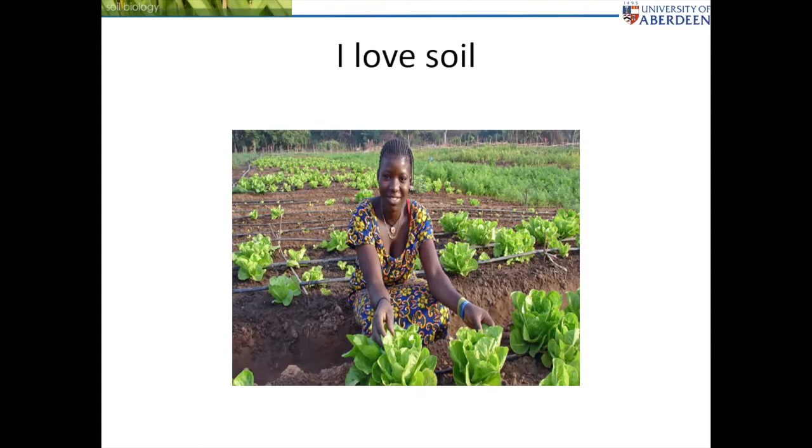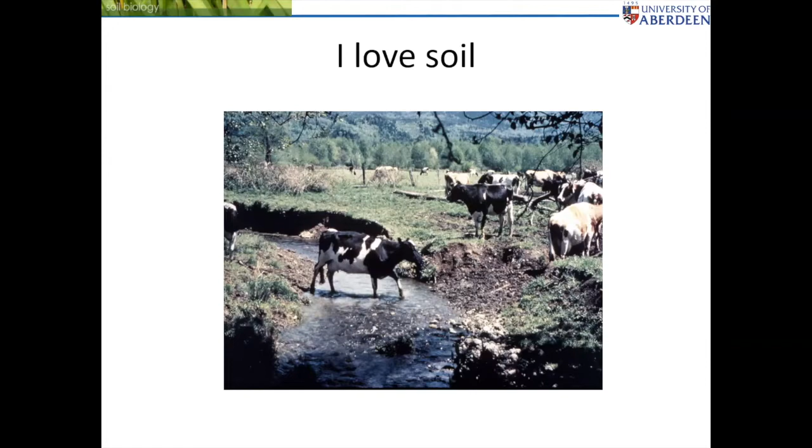In fact, really putting my research and my teaching in perspective, I love soil. I love soil because fundamentally, soil feeds the world. We can think about vegetation, but also I love soil because it hosts livestock as well. We forget that in this part of the world, livestock is such an important component of livelihood. I love soil also because fundamentally it hosts the plants that fix the carbon that COP26 is all about.

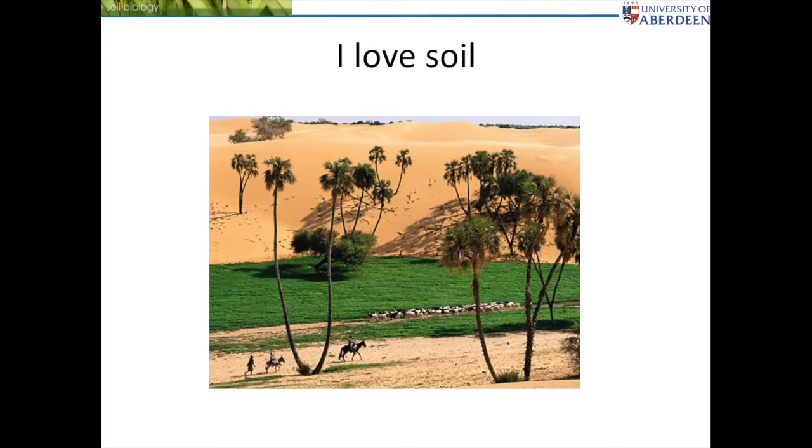love soil because it is the boundary between aridity and sustainable agriculture. I've done a lot of work in the Middle East, and again, we can see that soil with very, very little adjustment can suddenly feed people, stabilize land, and be quite different from other component parts of the environment.

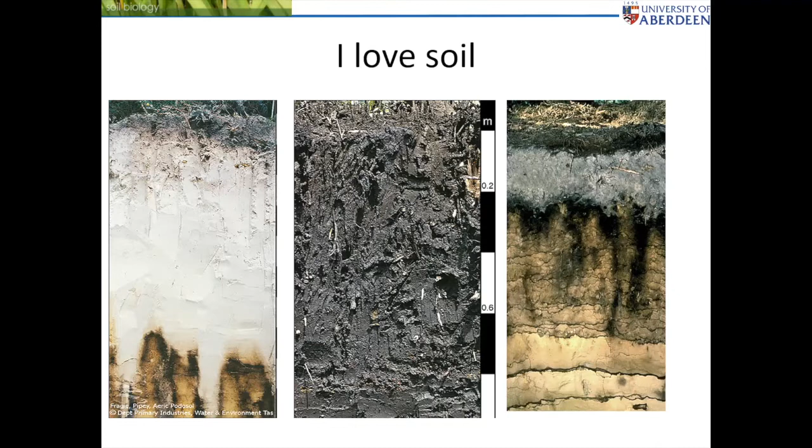But perhaps most importantly, I love soil because it's a very beautiful feature, and it's something we don't often see. We can look at this image and see the colors. We can see the presence of organic carbon. We can see leaching. We can see iron. We can see highly oxidized environments. Soil, regardless of where you are in the world, is a really beautiful feature, and it's part of our environment.

But tonight, I'm not going to focus on beautiful soils. I'm going to focus on the opposite. I'm going to talk about soils that we've wrecked through the release of pollution into the environment.

And I can think about pollution in several ways. I can think about elemental pollution. Let's look at the periodic table, pollution caused by agriculture and industry. I'm going to touch on hydrocarbons as well, industrial and spills. And also you can think about pesticides, when we purposely apply a poison into the environment because it might degrade or it might stay there in the future.

And then finally, and I'm not going to talk about this at all tonight, but it's something maybe to discuss in the future, is the impact of nanoparticles in the environment, because ultimately these will be sequestered into the soil environment.

Well, let's start with potentially toxic elements. I use that term because I'm not just talking about metals, I'm also talking about semi-metals, antimony, and arsenic in particular. What we can see here is that there's a group of elements coded red that we tend to call heavy metals: chromium, nickel, zinc, and also we can see arsenic and antimony underneath the nitrogen and phosphorus. Now, some elements respond to my first graph on the right of the screen.

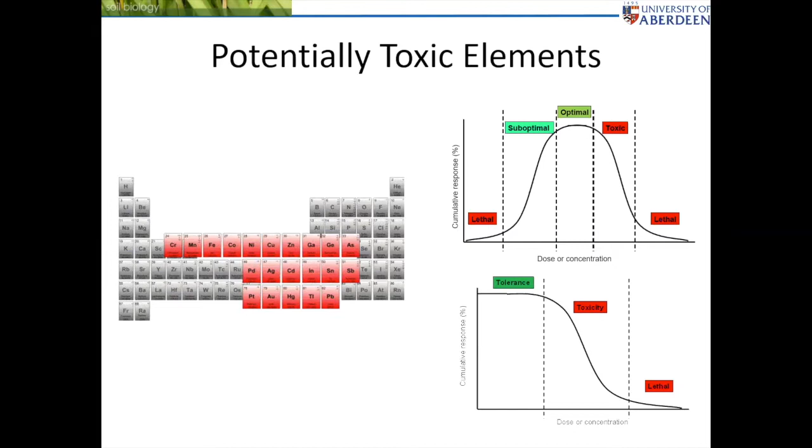But the second graph shows a different set of elements that includes mercury, lead, cadmium, antimony, and arsenic. These are elements that we don't think have a credible biological beneficial purpose. And therefore, at lower concentrations, organisms can tolerate them, but then again become toxic, and at some point become lethal. So one of the problems we have within soil is not just measuring the concentration of a given element, but placing it in the context of the harm that it might cause.

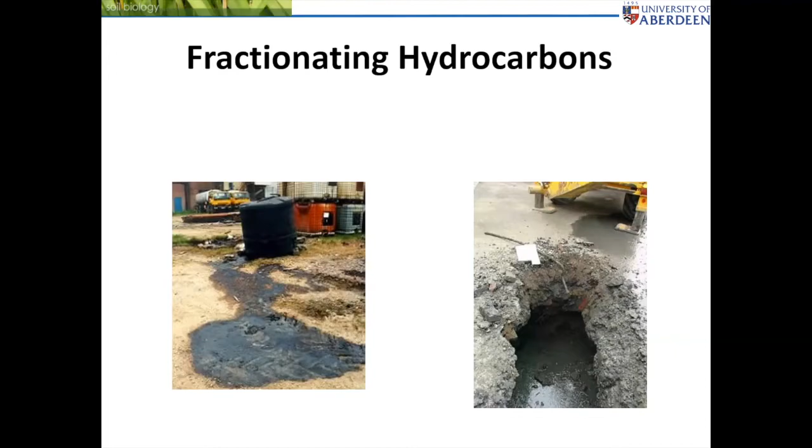The hydrocarbons are slightly different, and this is just an example of two areas where I've captured leaking hydrocarbons. In addition to my university position, for a long time I had an environmental consultancy and diagnostic company that specifically focused on cleaning up contaminated soils. I'll use many of these examples this evening.

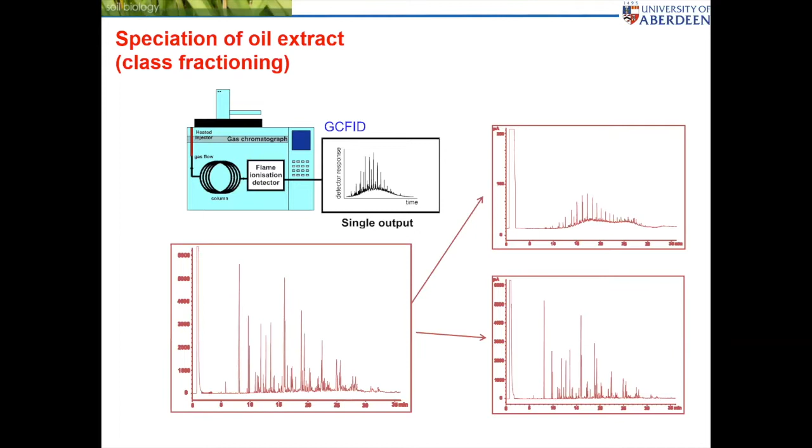When we look at hydrocarbons, we have to chemically quantify the amount of the hydrocarbon, and that's why I want to use the term fractionation. So I take a sample, I use a solvent to remove the hydrocarbon, and then I run it through a gas chromatograph. The gas chromatograph allows me to see the different lines of molecules separated by temperature. So as I look at the right-hand side of this graph, I'm seeing molecules that are generally of a heavier molecular weight than I'm looking at on the left of the graph. So it allows a separation, and I can then look at those individual peaks and relate them to molecules.

Now, what we then think about is how can we relate a measured concentration in the field to the potential harm that could cause to different receptors. By receptors, I mean humans, I mean ecology, and I also mean water.

And believe it or not, the key receptor that we use to protect soil is a toddler. Now, what we don't do is give thousands of toddlers soil and then see when there's an impact. What we do instead is develop lab-based systems that understand the amount of a given contaminant that can be desorbed from the soil and assimilated into the toddler. We choose toddlers because they're small, with a small body mass, and they're also prone to licking their fingers and actually taking in more soil than adults.

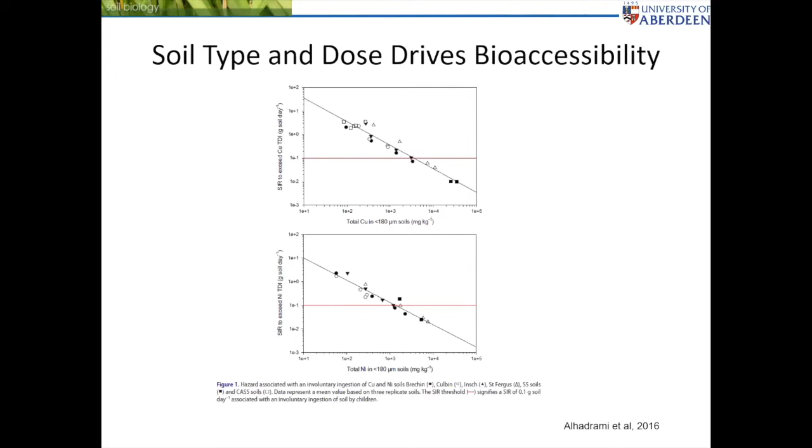Now, we can actually correlate quite clearly that there's a relationship between the amount of soil and, believe it or not, the size fraction of soil and the harm it does to a human receptor. And that's widely published.

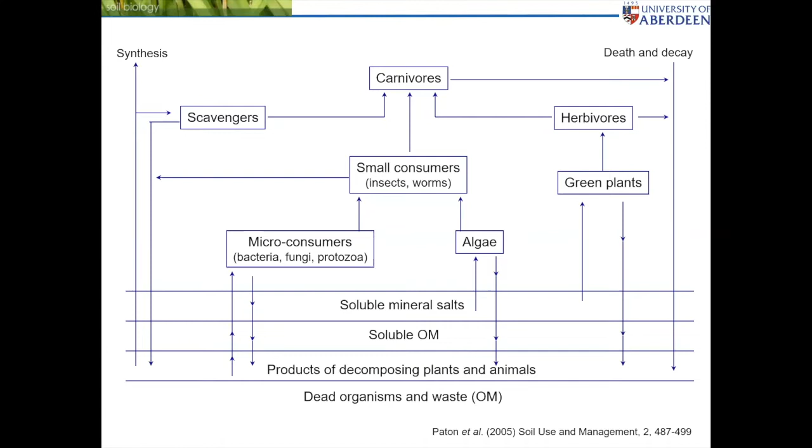When I think about ecological aspects of soil, I stand back and I see an incredibly complicated relationship. This shows at the base of this figure, I've got organic matter, dead waste. What happens is microorganisms will process that and they'll liberate things like nitrogen, which can be transformed from organic to inorganic, and then that's taken up by plants. So there's lots of different functional activities taking place in plants, and we can begin to see how we are impacted by the presence of contaminants.

In fact, what I specialize in is looking at biological tests to understand the harm caused by pollution. So I use a lot of different microbial tests, such as measuring activity, the size of it, looking at key processes like nitrification, or looking at enzymes in the soil.

I then also use earthworms, because earthworms are easy to count, easy to grow. They live in the soil and they eat the soil and they exude material. You can look at how much harm contaminants do by looking at the impact on earthworms.

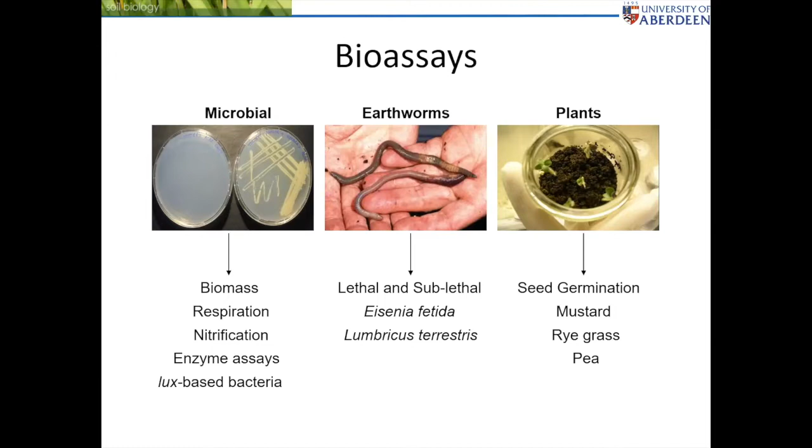And of course, I look at plants, because plants ultimately use the soil, they make available different components, and we can look at germination or mature plants in terms of that process. So when I look at ecology, I'm trying to understand the functional relationship of these different components.

Now, when I think about humans, I'm able to sit down, in the case of organic molecules, and relate observed human effects to different concentrations. So if I look at this table here, I'll just pick on some key details. The first thing is I can look at the different fractions, so aliphatic, meaning straight chains, and aromatic, being ring-based structures. I've not named individual molecules here.

What I've done instead is I've focused on different fractions. So the first fraction, aromatic C5 to C7, carbon 5, carbon 7, that includes benzene. And we know benzene is a carcinogen, and it's not particularly good to play about with benzene, to inhale it or to touch it. So we can see here that the residential without plant risk value is 0.6. That means if the value is less than 0.6 mg per kilogram, no long-term harm is likely to be caused by children playing in that material.

Now, if I scan down and look at, for example, C35 to 44 aliphatic, so that's the chains with carbon of 35 to 44, so big molecules. Basically, the risk here is at 27,600 mg per kilogram. That becomes a problem for the toddler. So we can see that we've got one at 0.6 and one at 27,600 mg per kilogram.

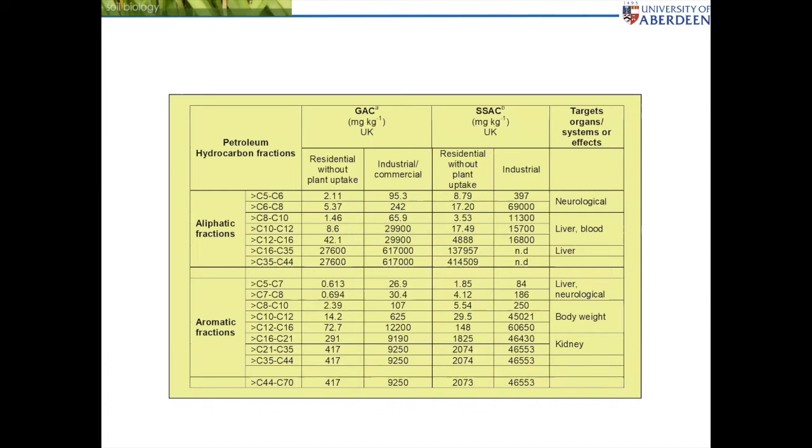So great differences. A lot of my time is spent developing these tables, using data that is validated to try and develop these, and then using this to develop models. And there's a range of models that we use within my group.

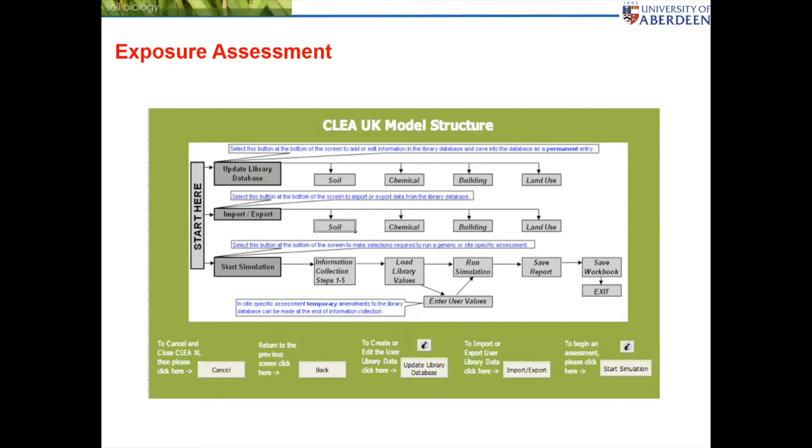This here is a UK-wide model called Contaminated Land Exposure Assessment. This is the sentinel model that the agencies use, and it allows a Monte Carlo simulation to derive site-specific criteria based upon really the values I've shown. And that's freely available and useful to look at.

So I can define a cleanup value, I can define a concentration that no longer poses particular harm, but commercially I need to create the link of how I can develop a technique to validate I've met that concentration.

And that's what I call predicting cleanup.

Over the years, I've done a lot of work on hydrocarbons, both in the lab and the field. What I developed with my team was a set of simple experiments that characterized the likelihood of degradation taking place in the soil. It was very simple: measuring the indigenous activity, the amount of genes induced to degrade hydrocarbons, the total concentration of the hydrocarbon and its form, and the number of degraders. Quite a simple process.

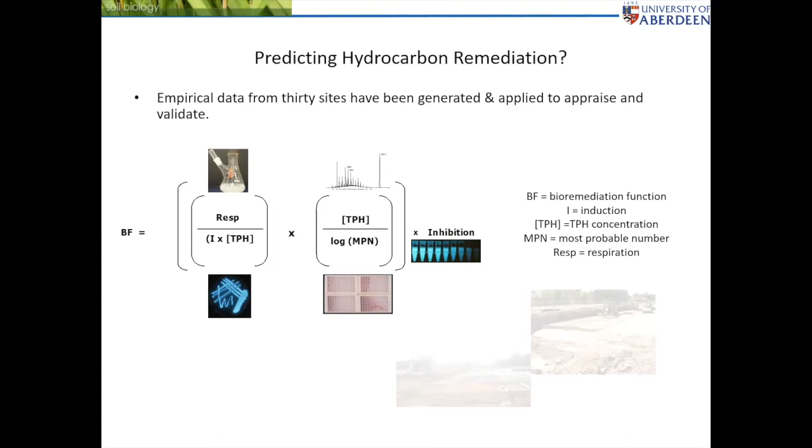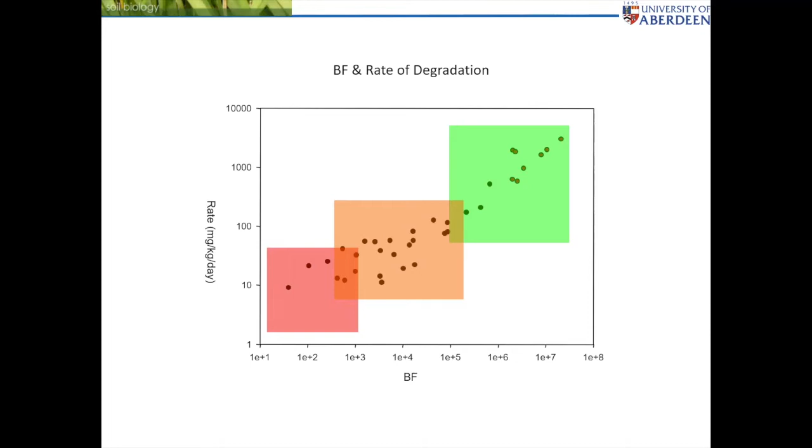What that enabled me to do is establish a traffic light system. If the factor of degradation was in the green, it meant it was happening—an absolute no-brainer, degradation would take place. If it was in the red, it wasn't going to happen very quickly for hydrocarbons, and it probably required a lot of help, nutrients or augmentation or something else. In the amber area was material likely to work but requiring a bit more of a prod. Commercially, I began to look at sites in amber and try to make them turn green. That was really quite an interesting way of promoting science.

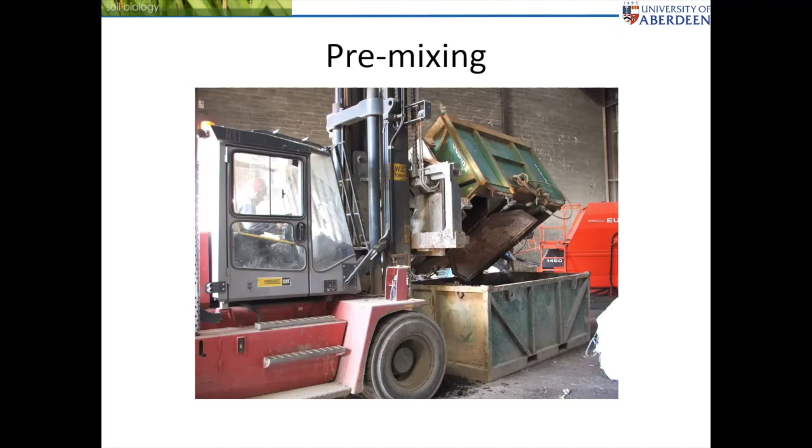At that time, I was really interested in thinking: well, here's a kilogram in the lab, what happens if we tried 10 tons in the field? So we went down to the Royal Dockyard at Rosyth, collected lorry loads of soil, brought it back up to Peterhead, mixed it, homogenized it, and then grew up hundreds of litres of degraders.

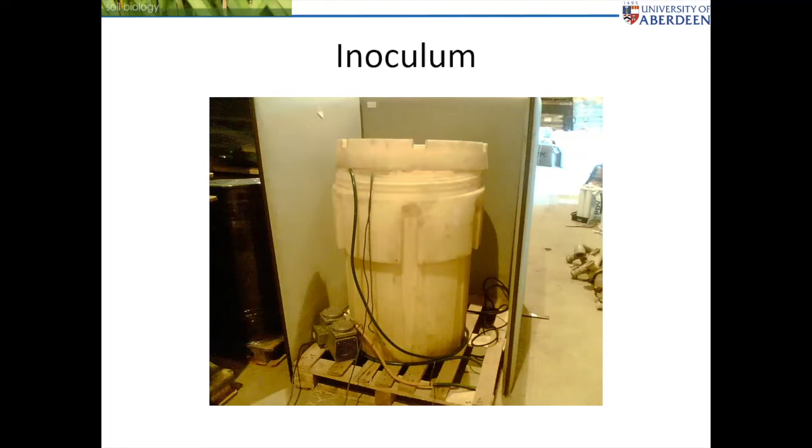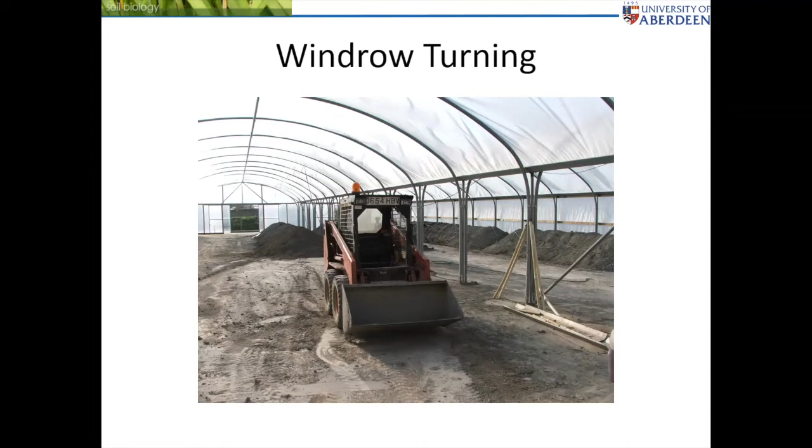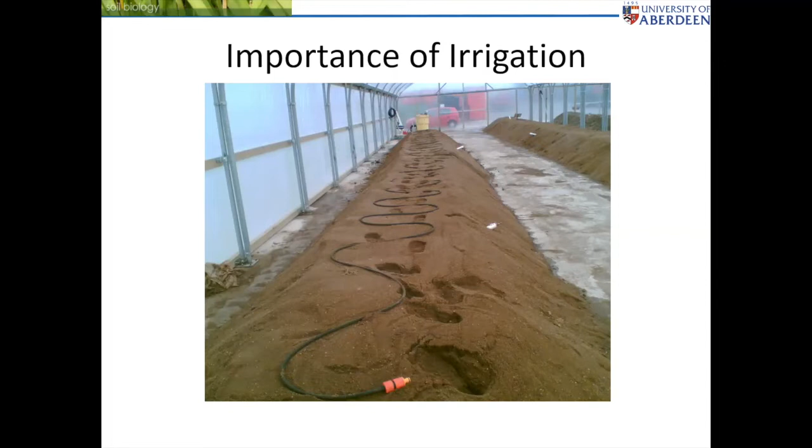Instead of just a jar, we used bobcats and turned the soil over on a very frequent basis, so we could see how the frequency of turning changed the behavior, since it's both biological and physical-chemical. There's the windrow being turned within a contained area. I'm adding lots of water, irrigating it, keeping it aerated, but also making it very moist, and sampling it with colleagues on a frequent basis.

When we look at a pile that's not turned—simply a static mass, very much the same as we saw in the field in the lab—we kick off with a concentration of just 2,800 mg per kilogram. The control sample stays about the same concentration, but I see significant degradation in the others, the nutrients plus inoculum treatments. By day 91, it's very much flattened.

What's interesting is when I look at the risk assessment criteria, I see it passes ecological but fails both human and water. So what's interesting here is I'm degrading hydrocarbons, but I'm not improving it for human processes. It's almost like bad remediation, if you like.

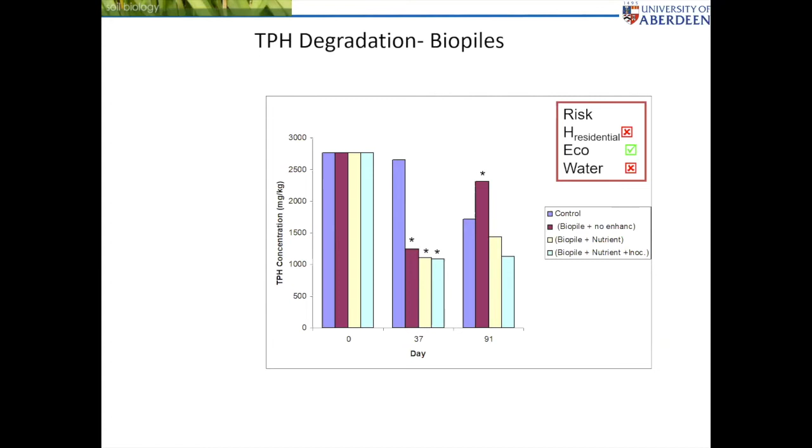When I look at a more aggressive turning process, I see a much greater reduction in hydrocarbon. The control sits at about 1,500 mg per kilogram after 10 weeks, whereas all the other treatments have declined much more quickly. In particular, nutrients and inoculum reach a threshold in 10 days. That's incredible. If I do nothing, I have to wait 80 days. If I'm aggressively managing it, I can do that in less than 10 days. So again, there's a cost benefit if I'm trying to remediate.

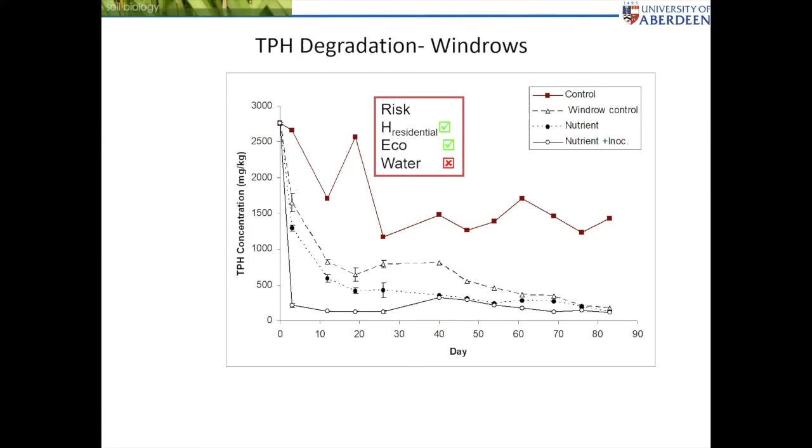The problem I have here is I pass residential and ecological, but I still don't pass water criteria in this case. I've still got contaminants that are unacceptable.

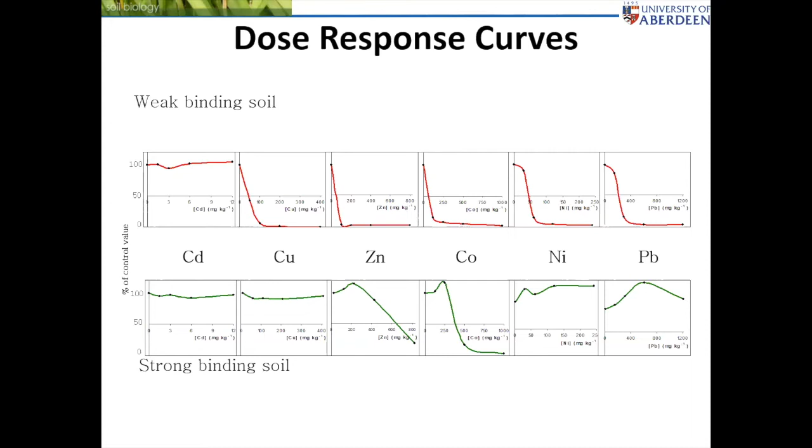Now when I look at metals, it's quite a different story because I can't biodegrade metals. What happens is metals fix into the soil. I've got two different soils here: very sandy, low pH soil at the top, and a much higher pH, finer soil at the base. I then used amounts of cadmium, copper, zinc, cobalt, nickel, and lead, and modeled a response of biological receptors. We can see classic dose response for the top, except for cadmium, but in the lower one I actually see a lot of responsive binding. That's because although the metal's there, it's encapsulated in the soil matrix such that it doesn't release and cause harm to plants or to humans once ingested.

We've done a lot of modeling where we take many soils, different doses, and we can characterize how buffering and how partitioning of elements behaves in the soil. In fact, one of the things I did in conjunction with the James Hutton Institute was to use this across, in this case, the Kingdom of Fife, to try to understand how the different soils and the tapestry of soils across a region had different behaviors to metal assimilations.

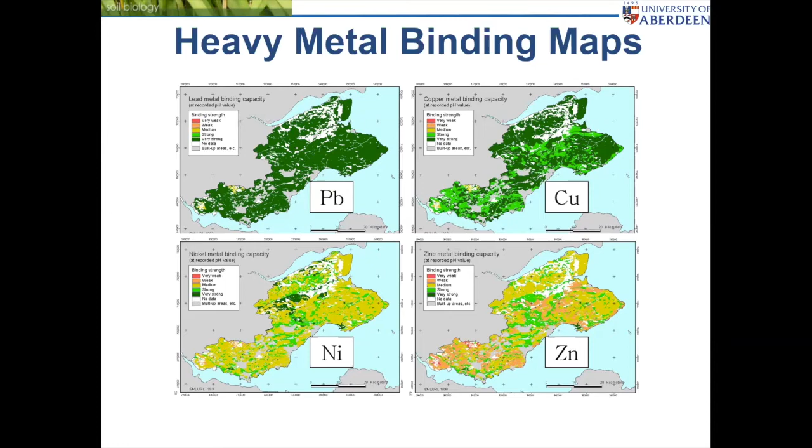I think it's quite an interesting overview. You can see that for zinc, there's much less binding than, for example, lead. That's because pH and texture define the binding capacity. Over time we've applied these to develop models that allow us to put numbers measured in the field and use all the capacity of data we've established to be protective in the cleanup concentrations we adopt. That's a really big breakthrough, and it was brought in by legislation way back in 2000.

So I've brought in the idea of receptors, the need to protect receptors - humans, ecological, water. I've brought in the background of the types of contaminants. I think I'll move on now to actually give you case study examples of remediation and how cost effective these are.

I might want to remediate water rather than soil, because the water might be running through the soil and picking up contaminants. To remediate water, I can use managing the water phase, or manage the non-aqueous phase, so if it's an oil that floats on top of the water, or I can have something completely passive - I'll show passive examples. Low cost absorption simply strips the contaminants out of the water.

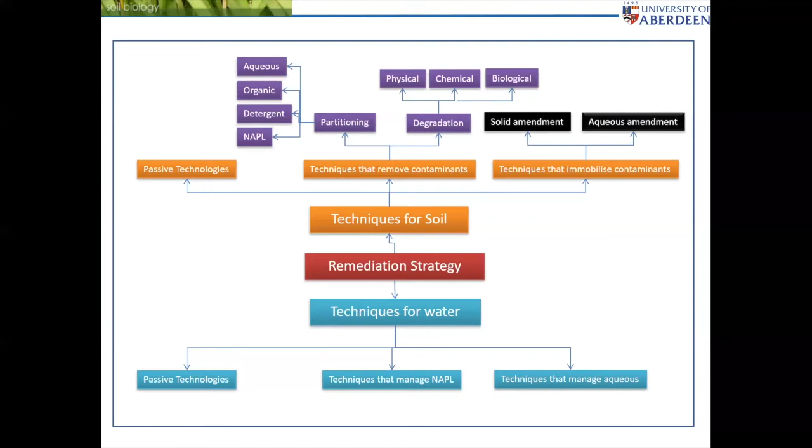And then finally, instead of removing the metal or the element or the hydrocarbon, I can add something that simply immobilizes it - it complexes it and stops it going any further.

When we think about biological degradation - and I'm going to come back to hydrocarbon degradation - it's part of a natural process. We know, for example, that white rot fungi will actively move into forests, and they'll take these enormous lignin molecules, which are often randomly associated, and using simple peroxidases, they'll oxidize the carbon bonds. But more importantly, once they begin to break up the molecules, we see a depolymerization process, so the molecules become much smaller. Then we find these become attacked really by bacteria. So we can't think of a single magic bug to break everything down - what we actually have is processing carried out by various organisms.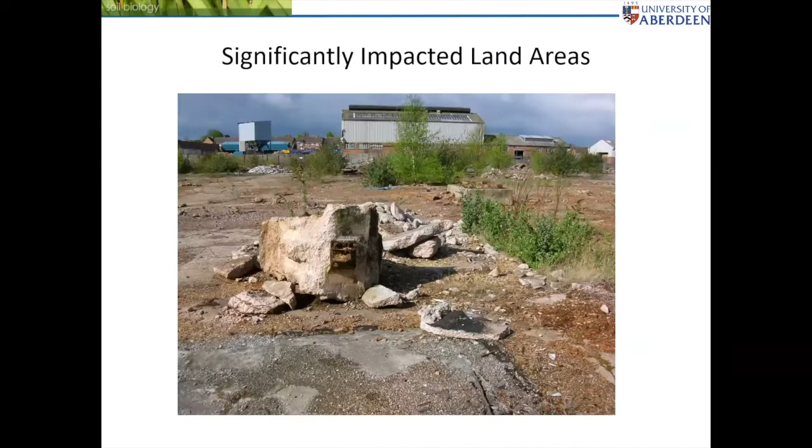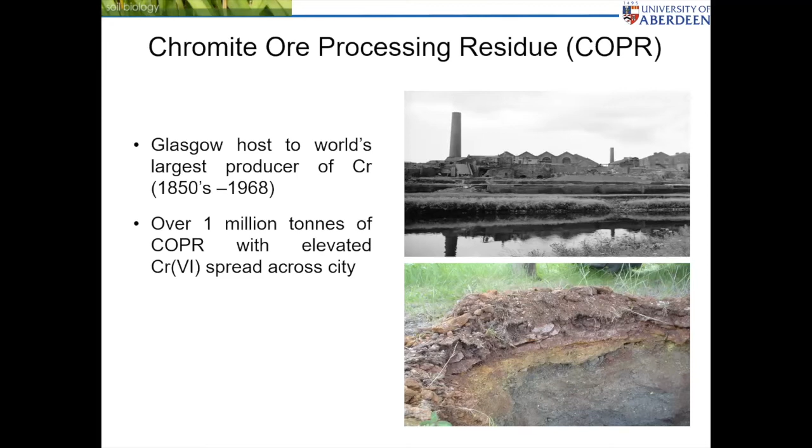Okay, so case study. I want to go to Glasgow to start with, to chromite ore processing residue. Glasgow was host to the world's largest producer of chromium for almost 100 years, White's Chemical Works. It was estimated that they produced about 1 million tons of waste that was then spread across the city, mainly in the East End.

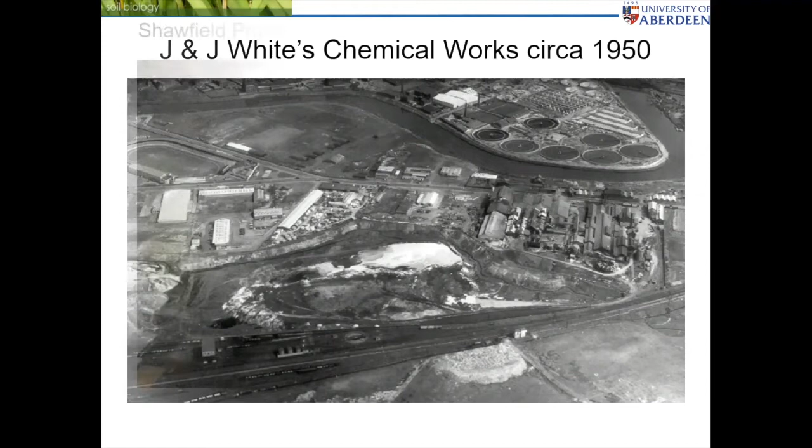Here in 1950 is J&J White's Chemical plant beside Dalmarnock. You see the enormous slag piles around the site. In fact, today, it's the area that had hosted the Commonwealth Games, and it's part of the legacy venture that's been passed on to the city of Glasgow.

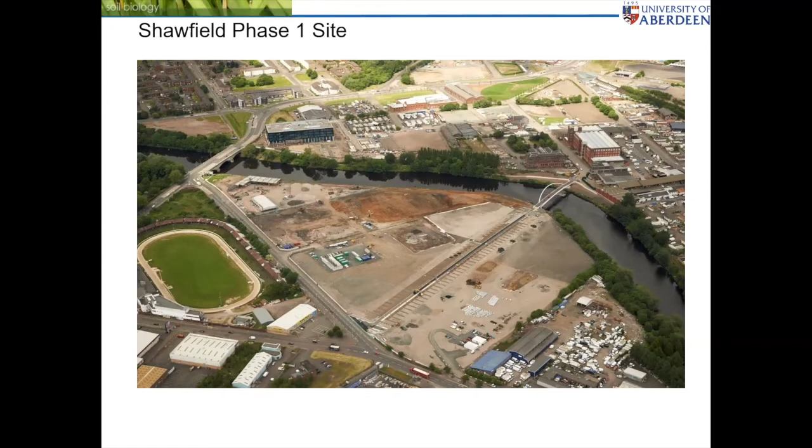Now, chromium's biogeochemistry is quite complicated, but I want to pick on two key features here. The first is that chromium-3 is the dominant environmental form. Chromium-3+ is not particularly noxious; at high concentrations it won't do you much good. In contrast, there's chromium-6+, which is highly oxidized. It is present at very high pH values, and it is known to be a carcinogen with inhalation.

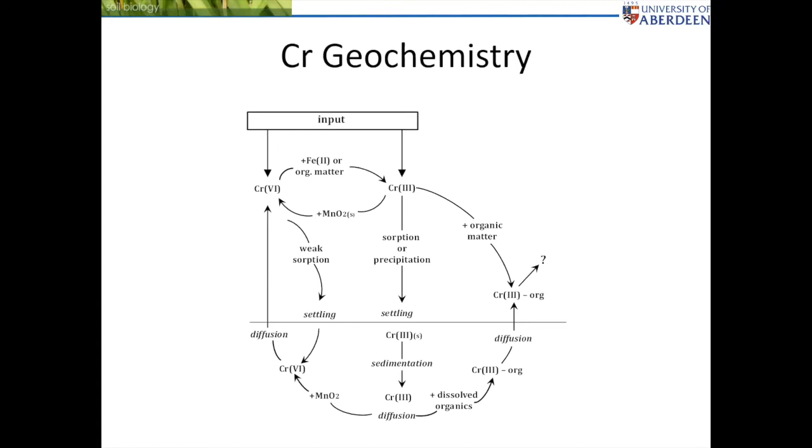It's also reckoned to be a carcinogen through drinking as well. But the key thing here is that it's very easy to turn 6 into 3, and it's quite difficult to turn 3 into 6. What happens in Glasgow is that the processing of ore produced massive amounts of 6, and the legacy of that has been really significant.

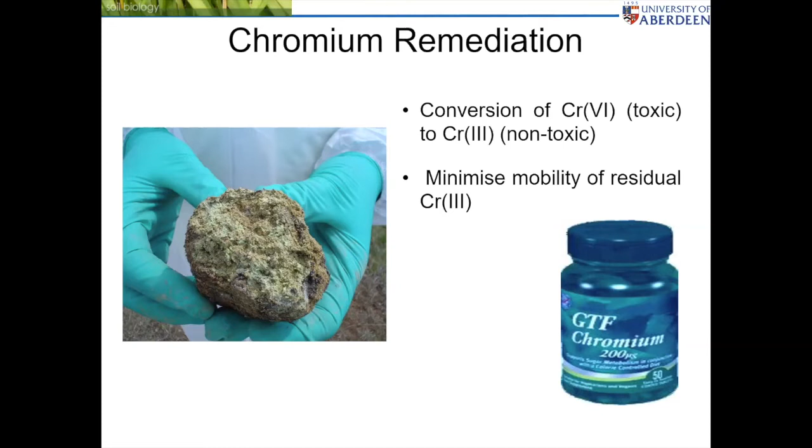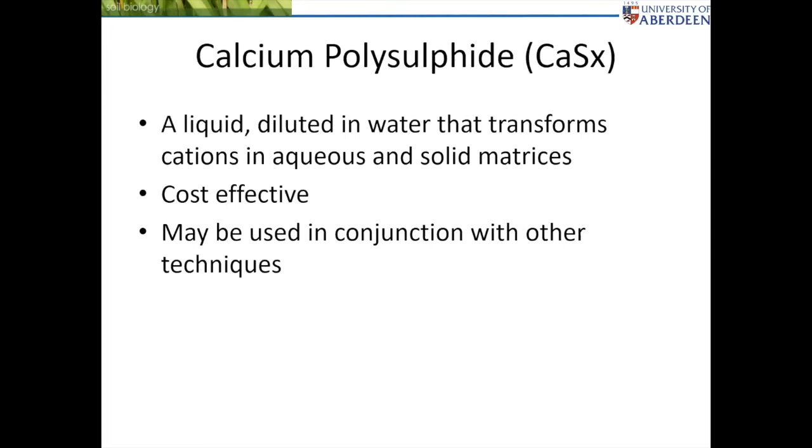There's been a lot of different techniques around to look at remediation. This one here is a product specifically sold to try and immobilize the green minerals we can see in the sample. But I became very involved in a thing called calcium polysulfide. It's basically calcium carbonate—you remove the carbonate, and then push in, under pressure, large amounts of amorphous sulfide. It creates a liquid that smells like rotten cabbage or rotten eggs, but it's very effective at the reductive process within chromium-6+.

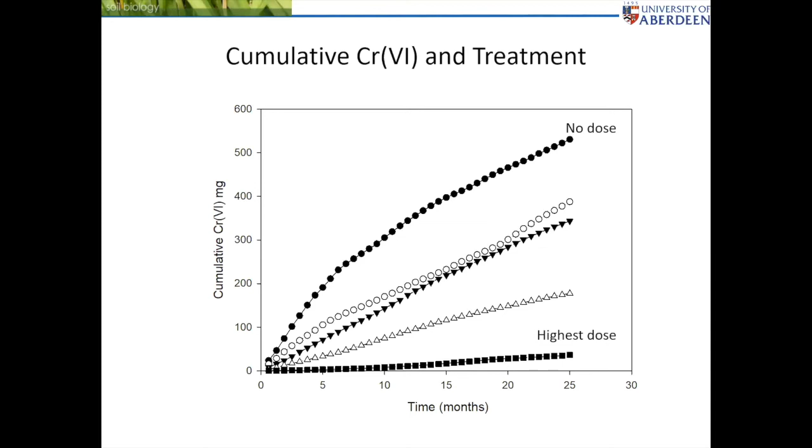In fact, here's some work I initially established over a very long period of time, about 2 years. I looked at samples from Glasgow, and I added different doses of calcium polysulfide. What I could then do was measure leachability, and I could see that the no-treatment was up over 500, but the highest dose I used was at about 3 or 4% of that 500. So we could get an angle as to what concentration worked.

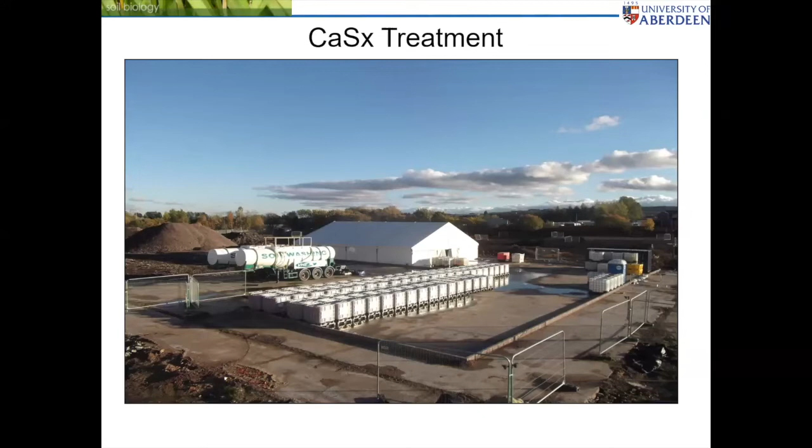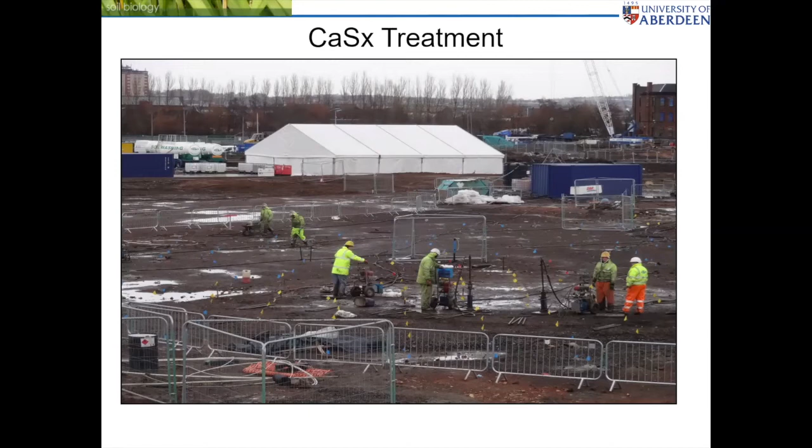So in the lab, we optimized it—we played for months on how to do it—and then we applied the system for real. This is the remediation taking place. We can see the boxes here, the IBCs, are all full of calcium polysulfide. What then happened is they were manually injected across the site at 2.5 meter intervals, down to a depth of maybe between 4 and 6.5 meters. You can see the hosing in the background, and all of these pumps that we used to set this up.

We used about 300 tons of calcium polysulfide to treat 10 hectares of land. What we proved was that all the green areas here showed the leaching was dramatically reduced. The red was a concern, but the yellow and ambers were quite positive as well. What we've done since then is to monitor the performance over time.

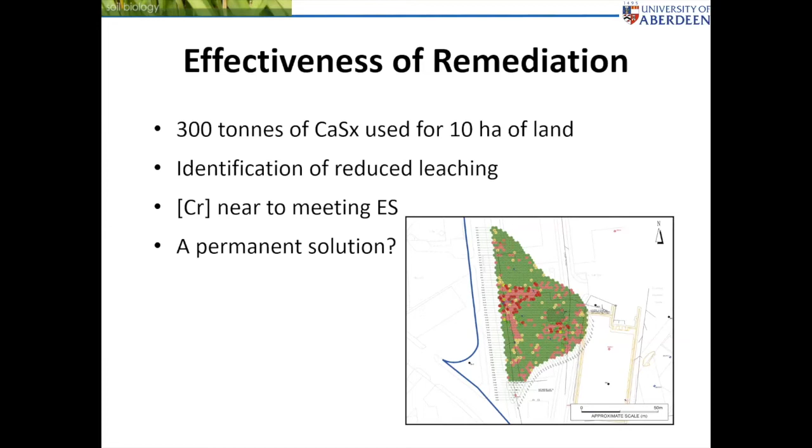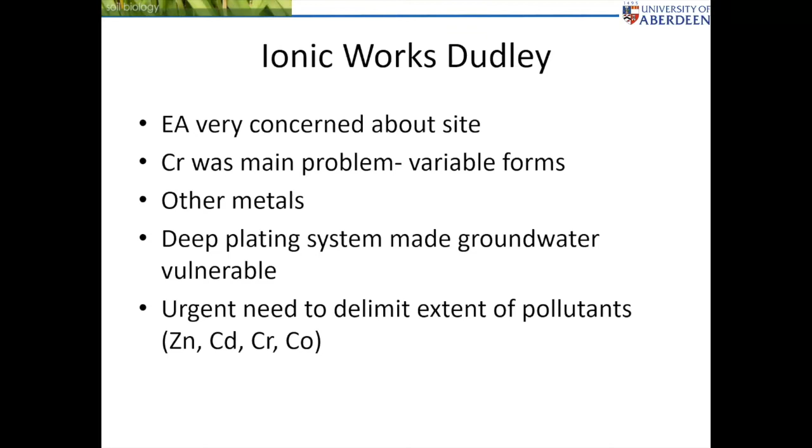It's not the only chromium site I've done. This was a factory in Dudley where they plated guns for ammunition for the army, and in essence, chromium plating had been used. But to make things more exciting, this site wasn't just chromium—it had acid tanks, it had nickel tanks, it even had cyanide, which is quite widely used to clean metals before adding finishing to it.

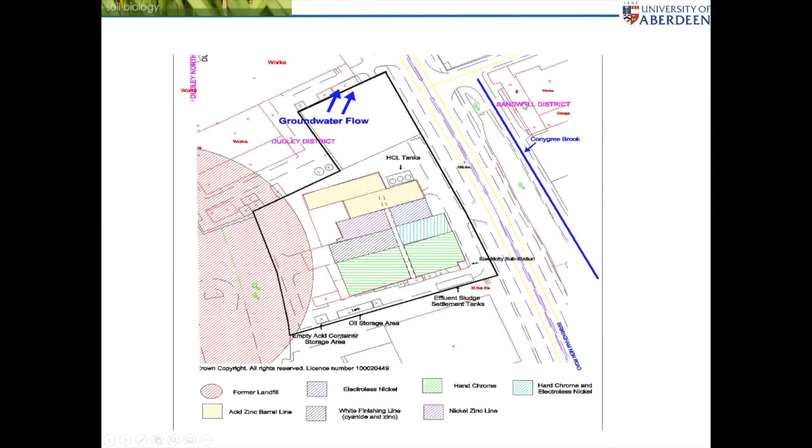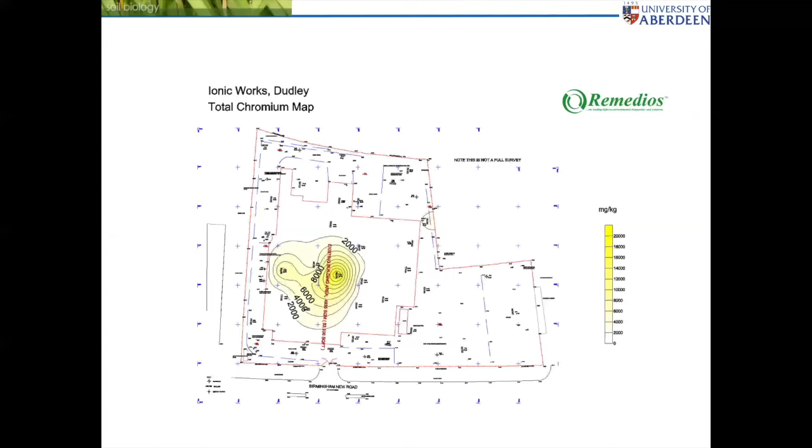What we found here was a massive source of chromium across the site. Again, the pH value varied a lot—we had pH values as low as 3 and as high as 12. But the chromium concentrations total were about 20,000 mg per kilogram, and of that, about 1,000 or so was actually hexavalent.

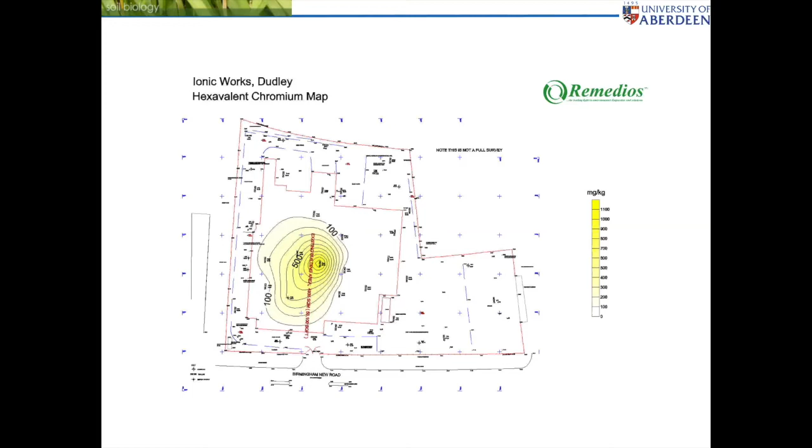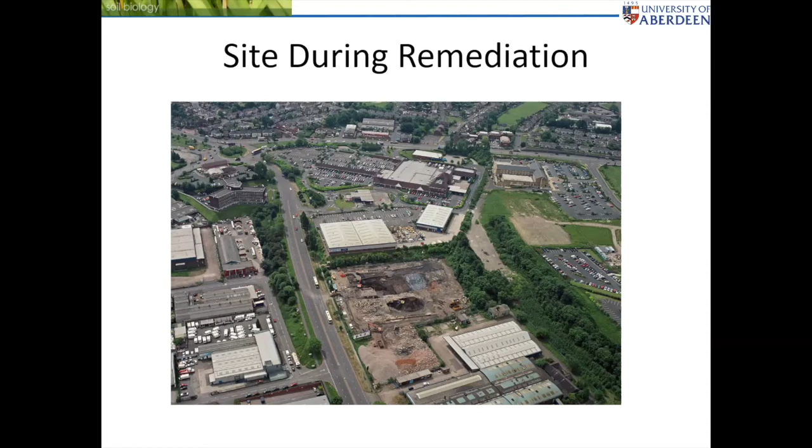So again, there we used a metal complexing agent, not calcium polysulfide. You can see from this site picture here, the large circular hole was where old tanks had leaked and actually caused the chromium to migrate. So big scale—not quite the 10 hectares of Glasgow, but something going on for that.

In the abstract, I said there were probably 250,000 orphan sites - sites that are contaminated but no one owns - across the UK. One of the areas I've realised is thousands of sites that are actually former mine sites where there's been metalliferous mining, and that's had a major impact in terms of water quality.

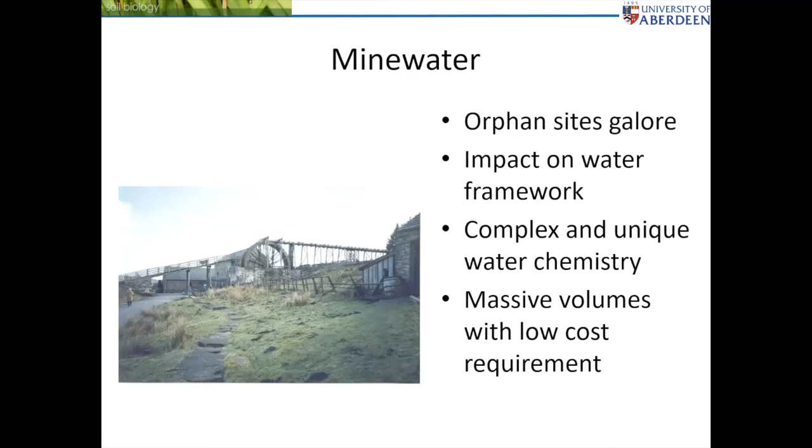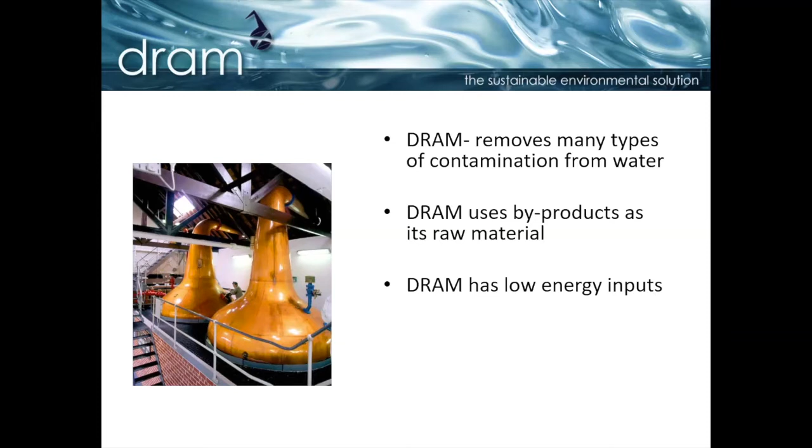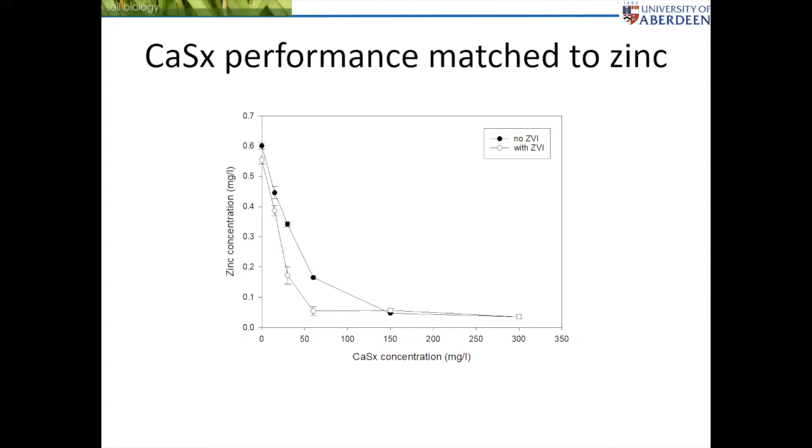With another colleague, about 10 to 15 years ago, we developed a remediation technique using whiskey byproduct material, which we called DRAM - a device for remediation and attenuation of multiple pollutants. It's a low energy passive process able to work with solvents but also a wide range of elements. We found it gave very effective and positive responses. Additionally, I had used calcium polysulfide to try and look at zinc, so the idea was to bring these two techniques together.

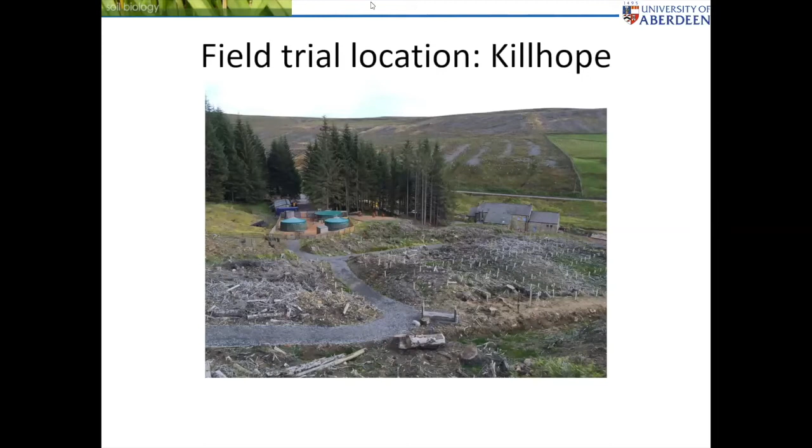The field trial here is at Killhope, in the Northern Pennines, just south of Newcastle - this is the old mine area. We developed a container-based system, which allowed us to reasonably work with thousands of litres a day, while also having the ability to stop if anything was going wrong.

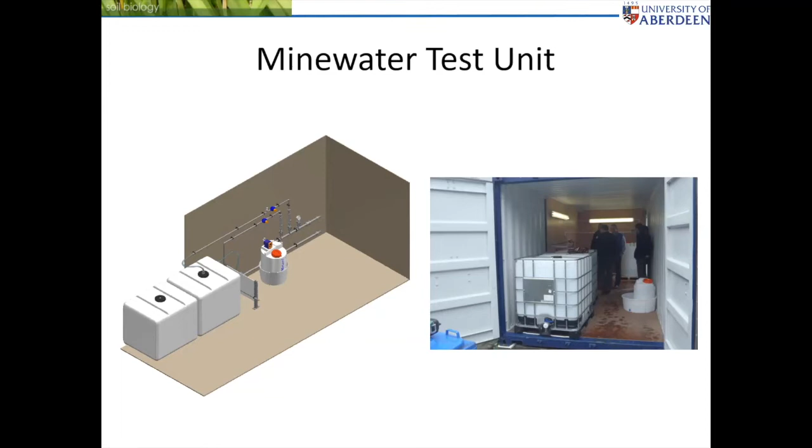Very simply, the container gets put on site. We then put a big header tank in to pick up the water from the mine, and split the flow. One part goes through passive treatment using DRAM, the whiskey byproduct, and the other goes through a calcium polysulfide pulse treatment, injecting small amounts every minute and then allowing settling thereafter. We then worked with the Environment Agency to agree discharge criteria for the process.

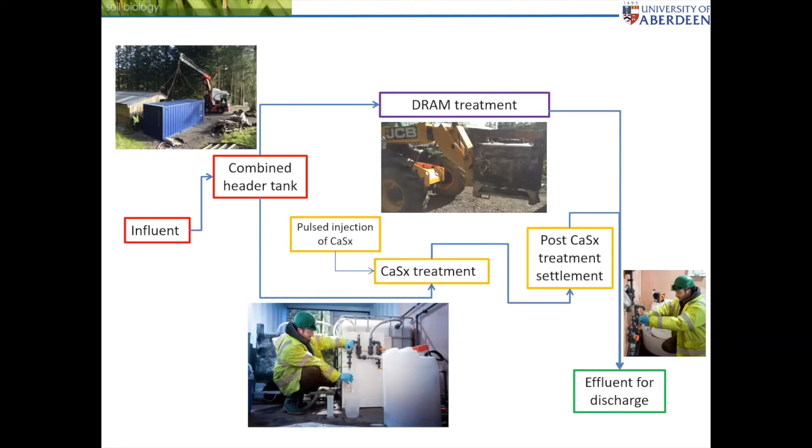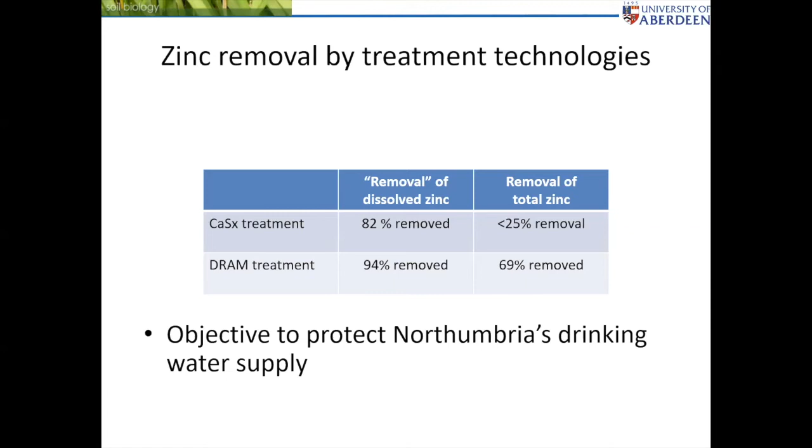What we found, very simply, was that calcium polysulfide removed about 82% of dissolved zinc, and DRAM removed about 94% of dissolved zinc. Zinc is a highly soluble element, so this is a really positive breakthrough, and it's being looked at for scale-up to deal with the process longer term, because the zinc is impacting Northumbria's drinking water supply.

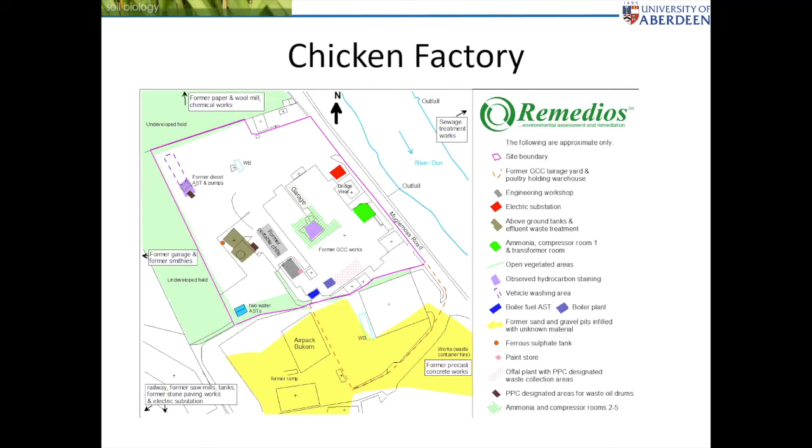Now, close to home at a site in Aberdeen, typically I don't have metals or hydrocarbons alone, I have both. In this case, it's not a chicken factory, it's a chicken processing factory, so in addition to elemental contamination and hydrocarbons, we also had a problem with animal waste - large tanks of putrefying material.

But today, the site has genuine value, with real estate upon it - residential houses - meeting all the criteria and issues I've talked about so far, with human protection being the primary drive.

We treated that by excavating the whole site - tens of thousands of tons - and then remediating it by a pile similar to what we use with the Bobcat: a geotextile membrane, a bund to catch the water, and then covering it in a membrane, turning it on a frequent basis.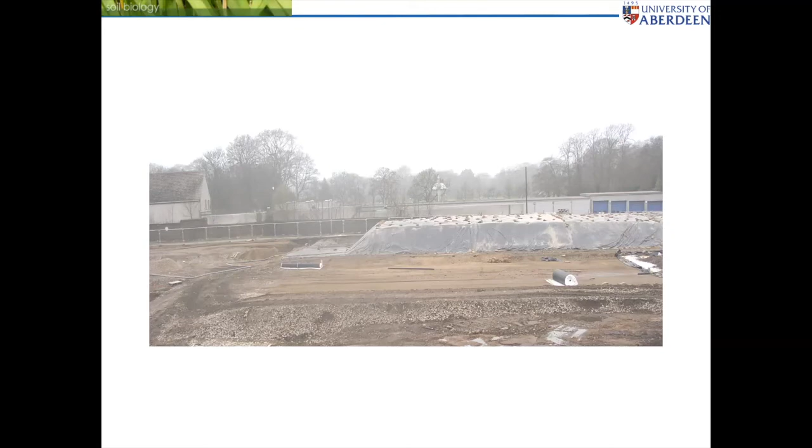You can see that's before, and again afterwards - we can see genuine valuable real estate being realised from what was previously valueless land in people's minds.

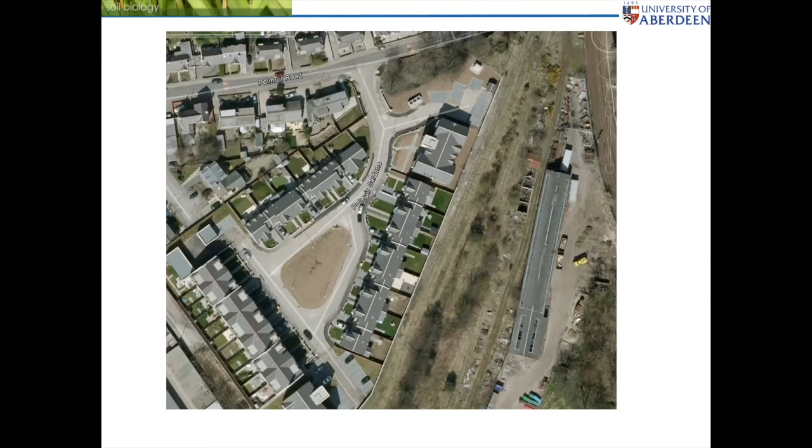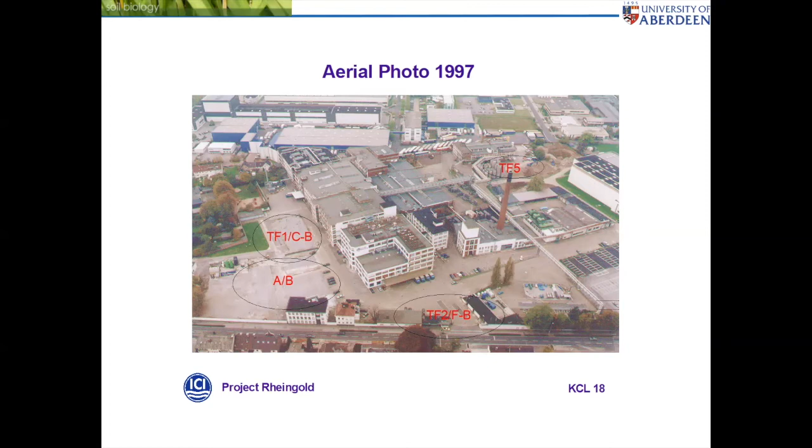One of the things I've done for a long time is work on a site here in northern Germany. This was a former ICI site where they made Dulux paints, and you see the TFs on this map represent tank farms. This is just where large amounts of benzene, toluene, ethyl benzene, and xylene were stored, which were used for the paint manufacturing.

Again, when you look at the site, this is just a representation of key contaminant zones. We can see large amounts of very deep benzene migration down to tens of metres, shown more systematically on the map.

The problem is these hydrocarbons preferentially degrade under highly aerobic conditions. So I had to pump air down into the soil to allow degraders to break down the hydrocarbon, produce volatiles, and capture them. There's a finite amount of oxygen that will dissolve in water, about 8 mg per litre, so I need to contain and sustain that amount, and make sure I've got a zone to pump oxygen down. That's what we did, and it's been running for about 5 years, capturing volatiles at the surface. Again, really bringing together an important venture to create sustainable remediation.

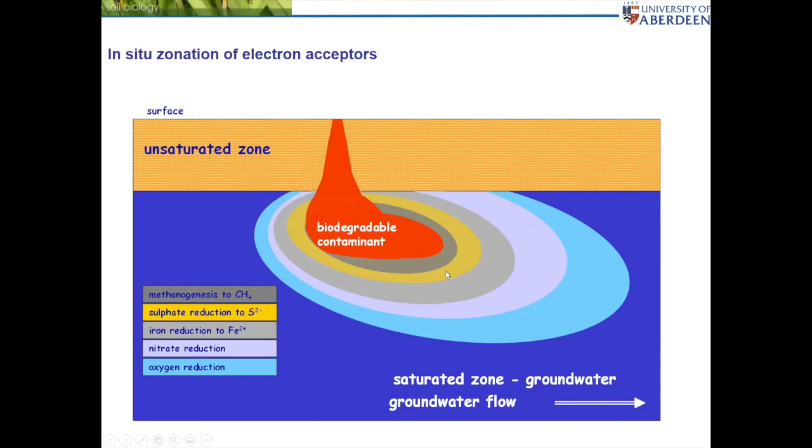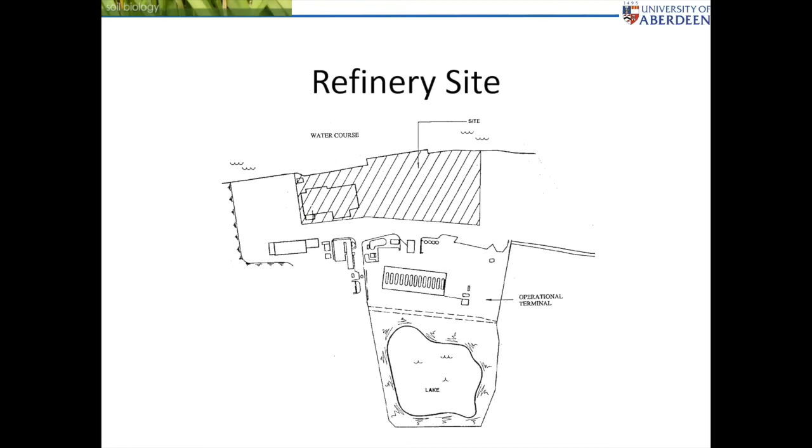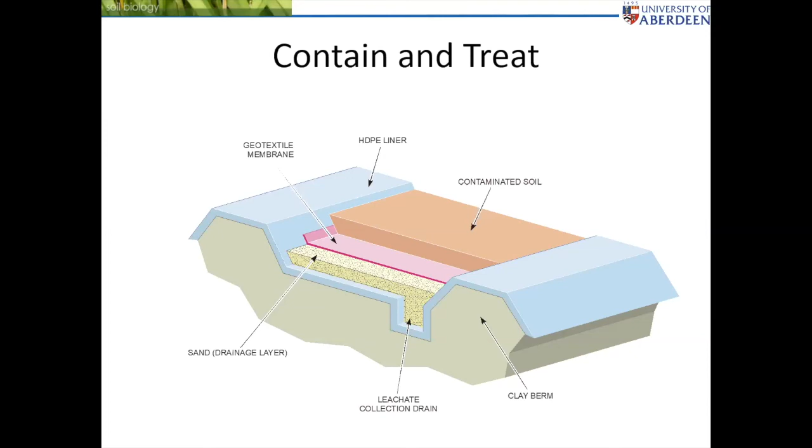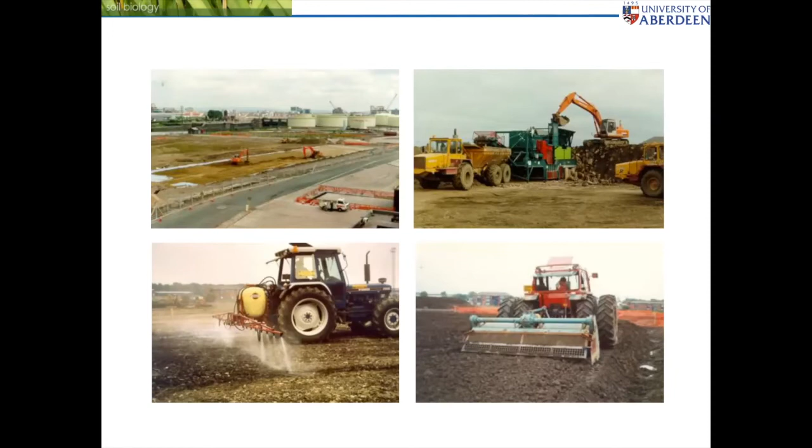Finally, a refinery site in the north of England beside a canal, with a lake behind it for firefighting. What we did here was basically land farm it: we created a clay basin with a geotextile membrane, added the soil, and at an incredibly intense scale, fertilized it, added other soil to act as an inoculum, hoed and furrowed it, and eventually backfilled it to the site once the issue had been resolved.

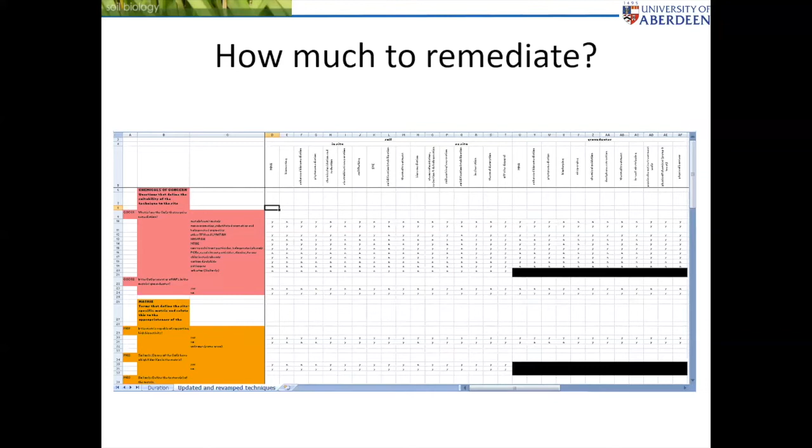Although that's a run-through of some examples showing that we can look at sustainable options, what I've done over the past 15 years is develop cost models to understand how much it costs for a given technique and scenario to actually remediate a site. I just want to give a few examples in terms of cost and then think about issues for the future.

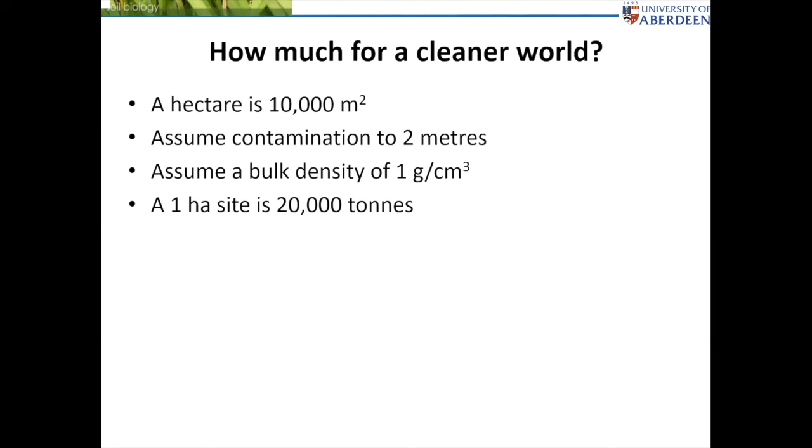Let's think of an imaginary site, 1 hectare, so 10,000 square metres. Let's assume the contamination is just 2 metres deep, although some of the examples I've chosen go down to tens of metres. Let's assume the soil bulk density is about 1 gram per cubic centimetre, so 1 hectare of soil would be about 20,000 tonnes. That's an estimate, and the bulk density here is quite high.

So think back to my example of a very low input biopile - the Bobcat one, or the chicken factory one, because that was low input and turned only occasionally. To put this into perspective, turning 1 tonne of soil costs about £1, so turning it 30 times costs £30. With low input and low turning, it would cost about £600,000 for a hectare to be cleaned up. If I double the rate of turning to 60 turns, that pushes it up to £1.2 million.

Remember the figure at the start - I could manage a situation to make things happen quicker. If I have to do something like the ICI German site, pumping in air, it's about £50 per tonne, so about £1 million per hectare - but remember that was 10 metres deep, so we probably want to put up about £5 million per hectare. The Glasgow example with calcium polysulfide, at 2 metres, would equate to about £1.1 million, but it was down to about 4 metres, so it's probably twice that value. Then the Dudley example, where I added an immobilizing agent after excavation, that's about £1.6 million.

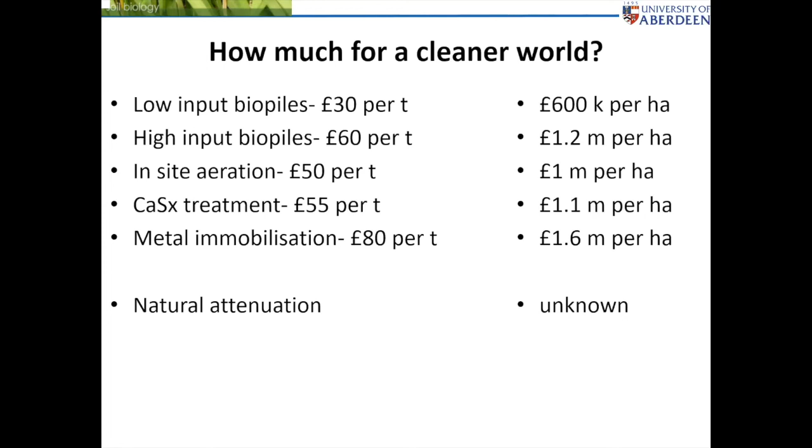Wow, these are big sums of money, only realized if the value of the land can offset remediation. One of the things at the moment is we're just doing nothing - we've got all this land which people are trying to guess will be worth money in the future, but we could be going ahead and getting natural processes done with really quite minimal engineering, at something in the region of probably 50 pence per tonne. And that would allow a longer-term sustainability option.

Over the years I've done a variety of things. I set up a company called Remedios back in 2000 with colleagues, about environmental innovation and technologies using microbial sensors. Then in 2007-8, myself and Lee Cassidy established a company using DRAM, which won a UK prize for business. But we need to train scientists in entrepreneurship, we need to think outside that box, and we also need to engage with scientists to upscale processes and make it compatible with engineering.

The other thing is we've been listening to COP26 for 10 days, talking about sequestering carbon. Wow, we've got all this urban and blighted land that has the potential to capture carbon, and we're not doing anything about it - we're just letting it be barren and letting perennial weeds come in.

And far, far too much of our urban environment is grossly blighted, and we're not using it effectively. I used to always say that remediation and mitigation of contaminated land was all about the money, but tonight it's not about the money, it's all about the carbon.

We have a massive real estate in the UK, 250,000 sites, which all have the ability to be converted into carbon sequestration, that are often not particularly owned by anybody.

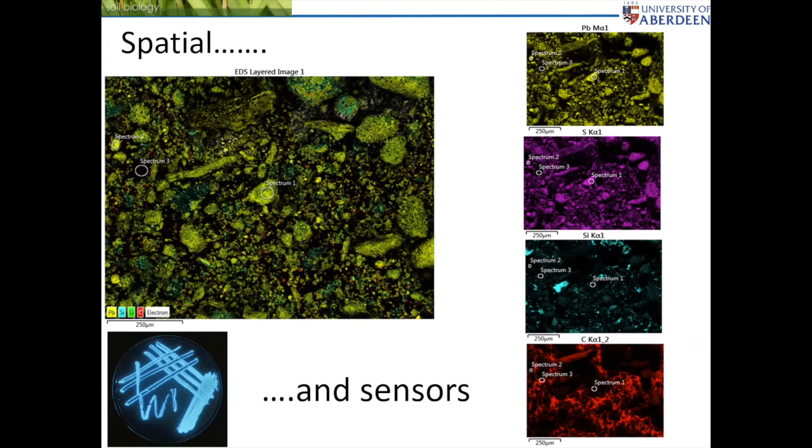And we've got technology. This here is the scanning electron microscope we've got on campus across the geosciences, working with John Still. And I can now go beyond just risk assessing concentration. I can look at the main figure here with different elements, and I can see exactly where lead is in that sample. And I can then begin to inject amendments that might be sustainably developed to begin to combat these metal impacts. And I can connect that to using sensors to understand the efficacy of the process.

So we're at a crucial point now. We have technologies that we can implement quicker now than we've ever done before. And we also have the capacity to understand, collect, manage, interpret, and use big data like we've never done before.

And we can also deploy microdevices across fields to capture moisture, temperature, carbon sequestration, respiration, heavy metal concentrations, biodegradation of hydrocarbons. We can do that with devices that are remarkably cheap. And remember, actual monitoring is one step towards remediation.

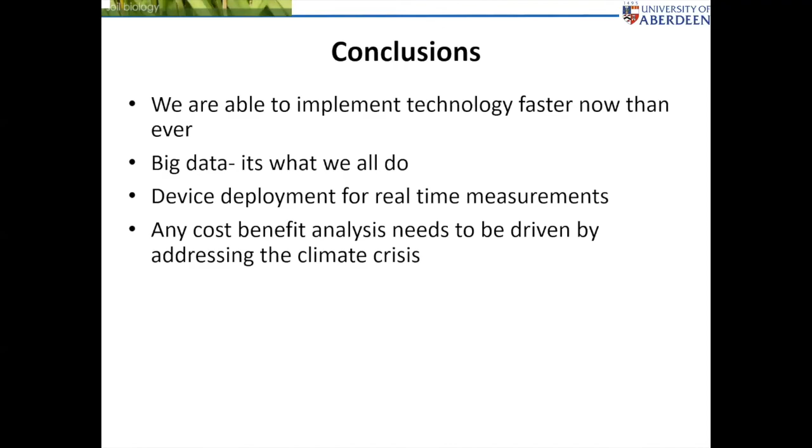And finally, for years, cost-benefit analysis for land was about net gain for developers, for privateers. But you know what? Net gain has to be about understanding the role of carbon, and more importantly, the influence that the processes we perform have on the climate crisis.

We need to join our thinking. We shouldn't be using lots and lots of turning with diesel engines and diesel motors. We shouldn't be adding expensive reagents. We shouldn't be trying to develop areas if they're so contaminated. We should think that perhaps the use of resistant tree species in these areas, the use of indigenous microbial populations for turning over material, that's the way we have to think forward.

And I use this example because, as someone who's been committed to the contaminated land sector for over two decades, it's now the case that we have a key component to offer in terms of the sustainable fight against the climate crisis. And just to wrap up, I want to thank a large number of colleagues from the University of Aberdeen. I want to thank Lee Cassidy for her work with me on DRAM, and then colleagues who generated and worked with me on that remediation data.

And with that, I'm going to stop sharing and bring that to a close. So thank you very much for your attention this evening.